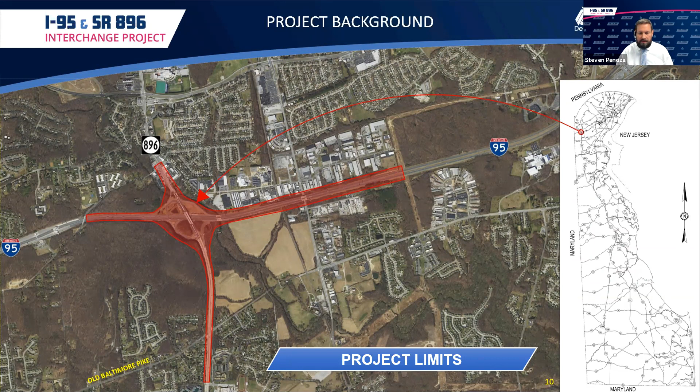So let's talk about the project background. These are our project limits on 896, from the Glasgow High School entrance going north on 896 up to the intersection with Welsh Tract Road. Along I-95, our limits are just east of the toll plaza, running east over Route 72 to about 2,000 feet. You can see the clearing there, that is for big overhead power lines.

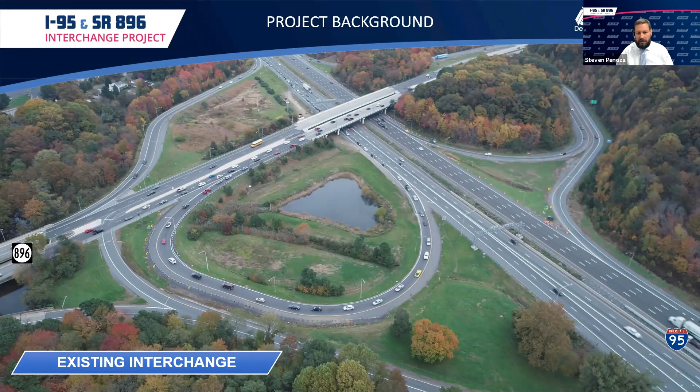So those are our project limits. Here's a drone shot of the existing interchange. You can tell that this was definitely done during the PM commute home. You can see in the outside travel lane of I-95 southbound, cars are starting to back up, which is one of the major issues with the current interchange configuration.

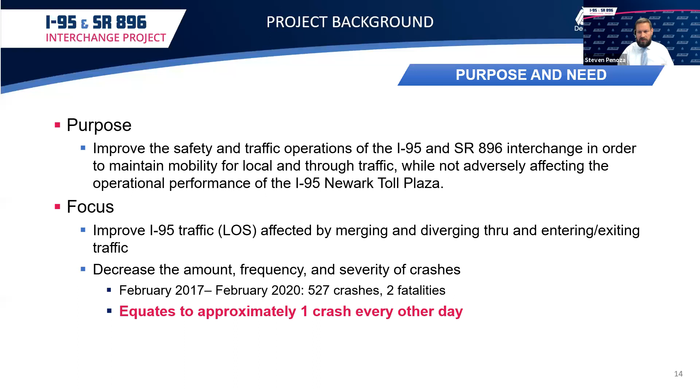So public outreach that we've done to date for some of you that have participated in those efforts. Back in December of 2017, we did our first public workshop, in person pre-COVID, much different format than today. At that workshop, we presented our purpose and need, as well as our 3 build alternatives. We had 137 people that attended.

The public was very much in favor of the project. Looking through the comment forms we got, 43% of people preferred alternative 1, which was our double flyover alternative. Then following that up in November of 2018, we sent out a project newsletter announcing that alternative 1, the double flyover, was chosen to take into preliminary design.

So now let's talk about our proposed improvements.

While the main interchange project is going through design, we did some breakout projects that we're calling our interim improvement projects. 2 of those were completed in 2020. Both were signing and restriping projects that we could get out quickly, that would help alleviate some of the issues we have out there today, but not solve the main issue of that weave we discussed on the bridge. That requires reconfiguration of the interchange.

Northbound I-95 signing and restriping, which we did in the summer of 2020. We created a dedicated lane for northbound 896 to northbound I-95. So the ramp traffic on that ramp traveling northbound 896 to northbound 95 now merges into its own lane. Prior to that, I-95 is down to 3 lanes, and then this ramp traffic comes on as its own dedicated lane, so that helps with the merging of traffic.

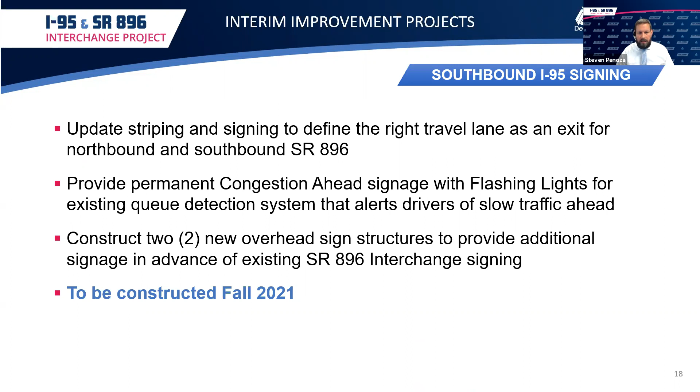As part of this project, we're going to construct 2 new overhead sign structures to provide additional signage in advance of the existing interchange signing. These 2 sign structures will be built to the east of what's out there today, and these signs were already going to be incorporated into the final interchange. We're just putting up these 2 structures ahead of time to help with some of the signing leading up to 896 to better define that exit. This project should be started and finished in the fall of this year.

So this is just a diagram of the sign that we're doing. Again, it's putting up 2 new sign structures and then also doing some overlay signage on the existing sign structures that are out there today.

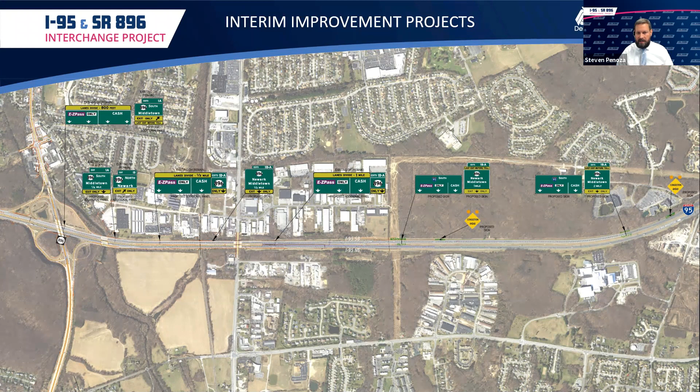This slide is just a summary of the proposed design elements. It's a complete reconfiguration of the existing interchange. All the ramps are getting reconfigured. We have to do some pretty extensive widening on I-95 southbound and northbound for the new ramp acceleration and deceleration lanes. The ramps are going to tie in with much longer acceleration lanes. The southbound ramp will have a 2-lane deceleration lane. So we're adding a lot more capacity for the merging and diverging of traffic.

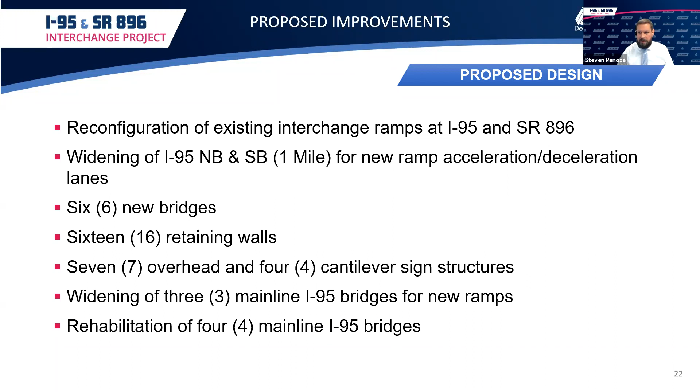As I said earlier, this is a major diverge interchange. It includes 6 brand new bridges, 16 retaining walls to retain our fill, 7 overhead and 4 cantilever sign structures. We're going to be widening 3 mainline I-95 bridges for the new ramps, and we're also going to rehabilitate the 4 mainline I-95 bridges that fall within the project limits. So a lot of work is being done for this interchange.

Now I'm going to walk you through each of the different ramp movements in the future configuration. First is ramp A, which would be if you're coming southbound on 95 and want to exit to northbound 896 into Newark. This ramp is very similar to today as far as getting off and merging on.

Ramp C is the flyover we talked about, southbound on 95 to get to southbound 896. Then we have our other flyover, ramp D, which is southbound 896 coming out of Newark to head onto northbound I-95 towards Wilmington.

Going the other way, 896 northbound or southbound to head south on 95, you'll take those exit ramps. Again, configurations are very similar to today, they're just moved closer to the interchange.

Finally, we have ramp J, which is our other heavy ramp movement. This is your northbound 896 to 95 northbound. As I said, today that ramp is only one lane, so in the future this will be a 2-lane ramp.

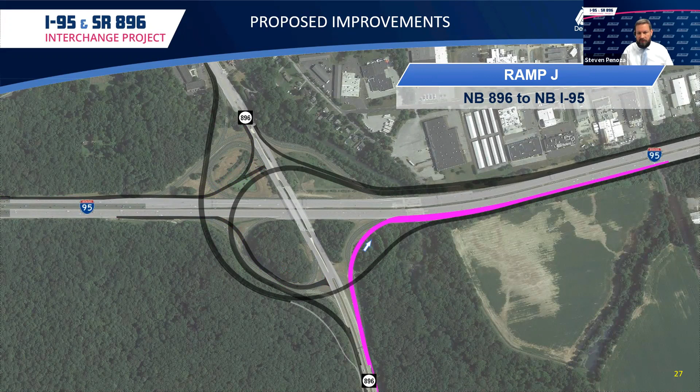We did add some additional work to the project since our last workshop. This work through the old Baltimore Pike intersection was originally going to be a project done in advance of the interchange. Construction for the interchange was moved up 2 years, which we'll talk about a little later, so it was decided we needed to incorporate this work into the interchange project itself.

This slide's for all the bridge fans out there, showing all the different structures on the project. The pink are our new big curved girder structures. Top left you see the blue, that's a new bridge over the Christina River. The green are the bridges we talked about being widened and rehabilitated. The yellow is a culvert that's going to be extended, and the orange lines on the 2 flyover ramps are all of our new retaining walls. Just wanted to point out that there's a large number of structures on this project.

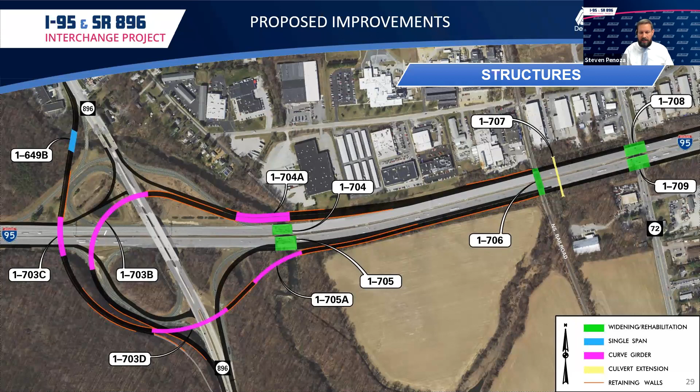One of the unique elements about the project is that, directly generated from public feedback at the first workshop, there was a big need for a shared use path crossing I-95. We were able to accommodate that with our alternative, a 10-foot wide shared use path connecting from Old Baltimore Pike up to Welsh Tract Road. This provides the missing link across I-95 for multimodal use. As the trail comes off of 896 and runs along ramp D, shown there in yellow, it'll be protected by a concrete barrier from the traffic going through the interchange.

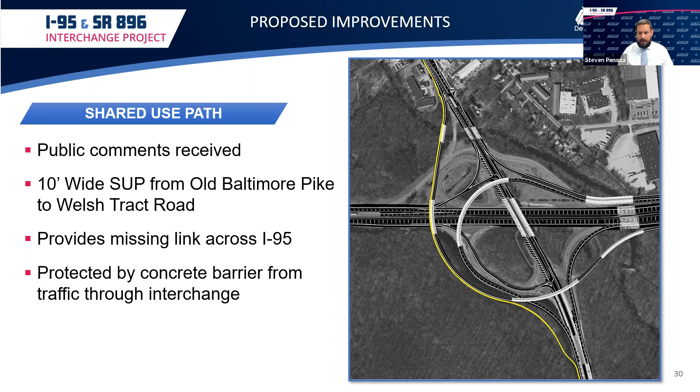We do have some impacts to resources, but we have no direct impacts to Iron Hill Park, which was another big reason we selected the alternative that we did. We also have no direct impacts to Cooch's Bridge Historic District. We do have wetland impacts that will require mitigation, so we are now evaluating off-site locations for a wetland mitigation site, as there's nothing on site suitable for the requirements we need.

We also have impacts to trees, so that's also going to require mitigation, and we're evaluating some off-site locations for tree mitigation. Some of those are also going to be sites that we're looking at for wetland mitigation as well.

Last, I just want to point out that there is a temporary impact to a bus stop in front of Rodeway Inn, and that'll be further coordinated with the department, whether there's a temporary bus stop added or if we direct people to the bus station that's about 1,600 feet up the road from there.

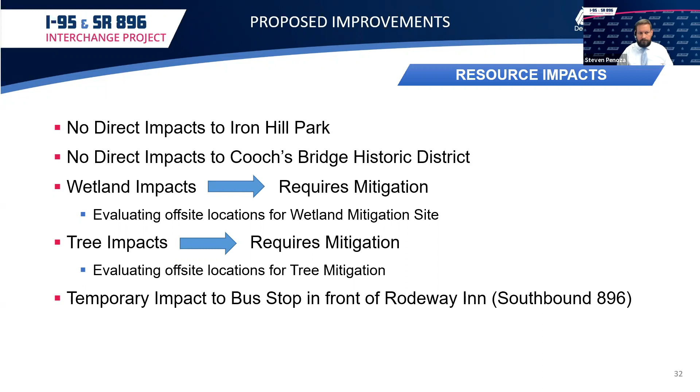This project does not have a lot of right-of-way needs. We have very limited property impacts. The majority of the interchange itself along I-95 is being built within the existing property that the state owns now.

This slide shows what we do need. So what you see in green are PEs, which are permanent easements that we need for both utilities and the shared use path, as well as some drainage on the left side of the screen. The blue is a TCE, which is a temporary construction easement. This is just a temporary easement that we need during construction to do some of our tie-in work, some repaving at the entrances, that type of work.

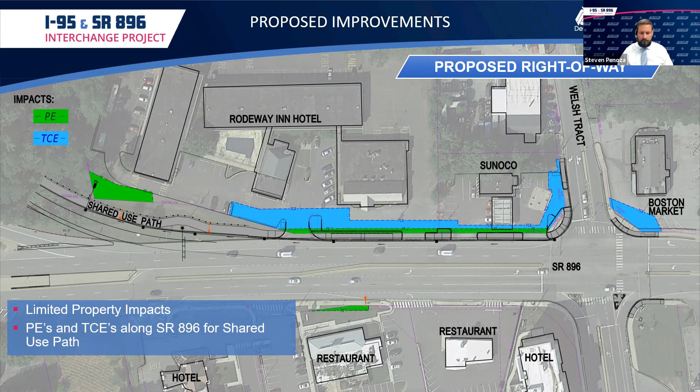I'm not going to go into the construction phasing for this project as it's still being refined, and we'll discuss why a little later, that's still in the refinement stage.

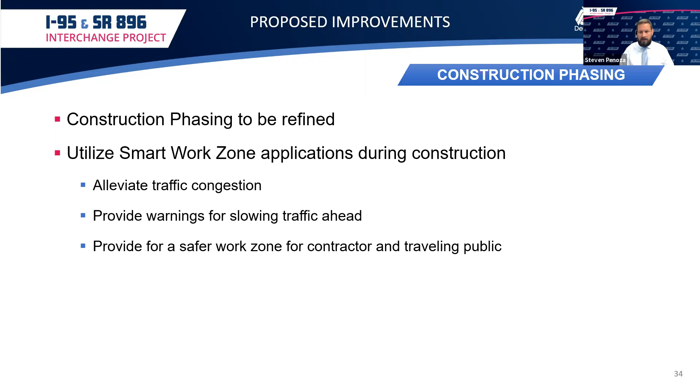But one of the things we are looking at doing is utilizing smart work zone applications during the construction. There's a lot of different things that go into that we're analyzing now, but the idea with smart work zone is to help to alleviate traffic congestion during construction, provide warnings for slowing traffic ahead, and the biggest thing is to provide a safer work zone for our contractor as well as for the traveling public.

Our estimated total project cost is $165 million. The good news is that DelDOT received an INFRA grant for $56.8 million. INFRA stands for Infrastructure for Rebuilding America, and basically the grant is to build and repair critical pieces of the freight and highway transportation network. We were selected based on reducing the congestion and bottlenecks to the freight network, as well as increasing safety of the interchange.

So what this has allowed is the project to get locked into FY23, which is the fall of 22 construction. That's when I talked about the project getting moved 2 years up in construction. It had previously been pushed out, and now we were able to move the project back up on schedule when we originally were planning on constructing it. This also has allowed us to pursue accelerated project delivery, which I'll go into in a little bit.

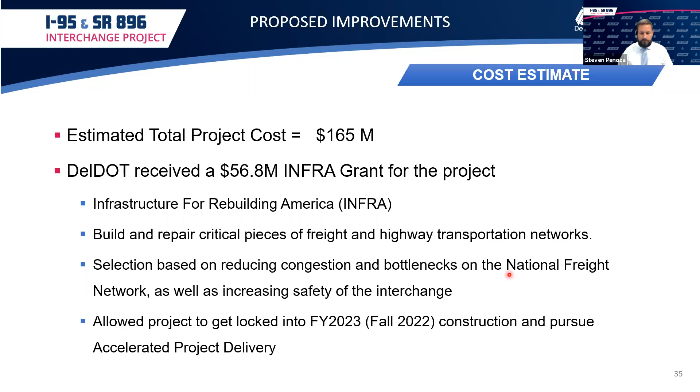Moving forward, we will be doing a robust public awareness campaign leading up to and during construction. There will be coordination with the local businesses along the 896 corridor to the north of the interchange in particular, and then additional outreach once the construction phasing is finalized.

Now I just want to talk a little bit about accelerated project delivery. Locking in our construction funds allowed us to pursue this. So this project is moving into a contracting method called CMGC, Construction Manager, General Contractor. This is a unique method used to accelerate project delivery.

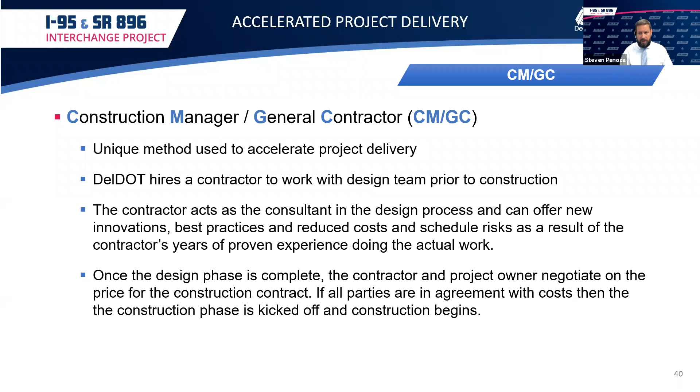CMGC is currently being used on the Restore the Corridor project on I-95 in Wilmington, for those familiar with it. So what are the advantages of CMGC?

Fewer change orders and less overruns. Working with the contractor, we can identify things in the design to look at so we're not going to get hit with changes during construction, because the contractor is working with us.

Efficiency during design from collaboration with the contractor—we're going to work together on the design. There are opportunities for innovation during design. As a design team, we may have innovations we bring to the contractor to see if they're feasible with how they want to do things, and vice versa—they'll bring ideas from other projects that can help save time and money on this project.

We can begin construction before design is even completed. Similar to the Restore the Corridor project, they did early work packages. The same can be done here, where we can start construction even earlier than design completion, before we're ready to do the final interchange construction.

It's basically a better relationship with the contractor—we're going to work in a team atmosphere. Normally we design the project, the contract is bid out, and the contractor and us go back and forth. This is going to be a complete collaboration on the project with the contractor.

It also mitigates owner risk for DelDOT and optimizes the construction schedule. The reason we're still waiting to refine our construction phasing has a lot to do with the way the contractor wants to build the job.

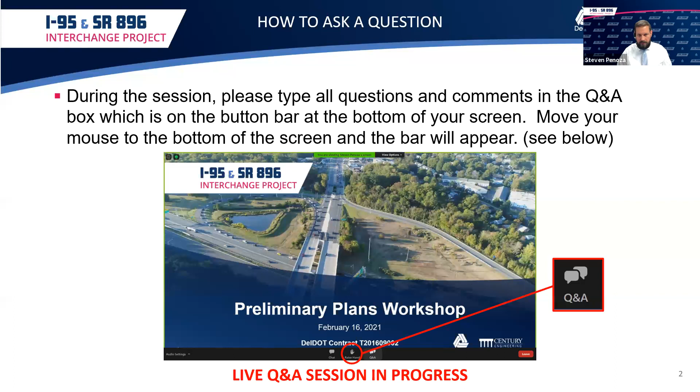Yeah, let me pull up the slideshow. There we go.

So as I said, this project is a major diverge. There is a lot of traffic today that gets off to go north and south of the interchange. The interchange itself, that's the biggest issue—it just doesn't have the capacity to meet the traffic on and off. The volumes here are almost to the point where it would be a major diverge for two interstates. That's the volume of traffic you get, especially in your peak hours.

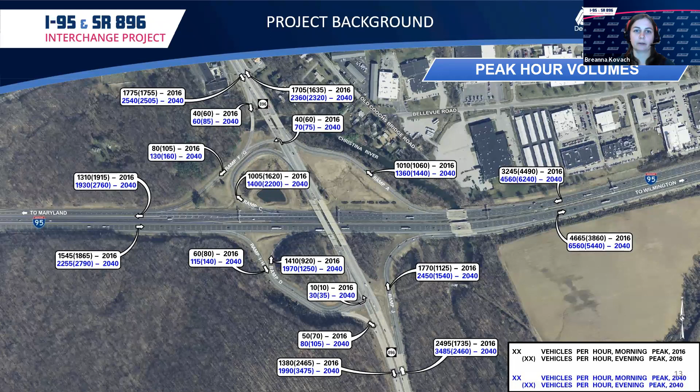Just to piggyback off of what Steve was saying, and what he mentioned earlier, I want to reiterate that not only do we have operational issues here at the interchange, we have major safety issues too, and there seems to be a pretty direct correlation with the operational issues we see here.

Yep, this is the slide. So just trying to reiterate that we're really trying to solve the issues we see. Again, the purpose and need of this project - understanding, yes, it is a bigger ticket project, but throughout the years, actually probably over a decade, there have been different changes we've tried to implement at this interchange, and some small fixes on the ramps. As Steve mentioned earlier, we've done interim projects between when we started this one back up in 2016 to now. We've done these little Band-Aid projects, and ultimately we still have these issues out here. So that's why we need this big makeover of the interchange.

All right, thank you very much.

Next question in general is regarding the noise levels along this corridor. There were several questions asked - is there any concern with additional noise this project may bring? Steve, I'll turn that back over to you.

As part of the NEPA process we go through for our environmental document, we have to do noise monitoring. So we did do our noise monitoring for this project, and based off of that noise study, it did not warrant having to do noise mitigation.

All right, thank you very much. Question regarding signals - are any of the ramps going to be signalized? No, that's a good question though.

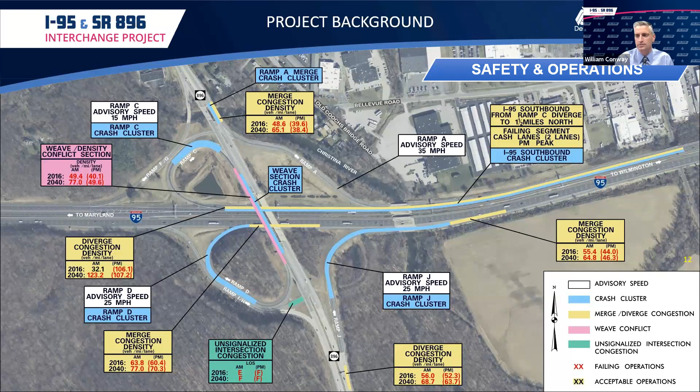Thank you, Pam. Okay, the next question is about barrier walls. Is there any other devices used to limit the cut-through drivers with the new plan? There are several safety devices out there, but I think the concern here is potentially cutting over 896. Steve, do we want to touch on that a little bit?

896 will remain very similar to as it is today. The medians are getting reconfigured in some places, but it will still have the median that runs down there as it is today. The only difference is one bridge will have a bridge pier in the middle of 896. But other than that, we're not really changing anything on 896 itself. Okay, thank you.

There's a question, and I believe this regards the larger I-95 project. How does this project interface with the I-95 project? Will it create more congestion initially?

Steve, you want to touch on the timing? This project will not be until after that project is complete. Yep, that is correct, and we don't anticipate any overlap on that.

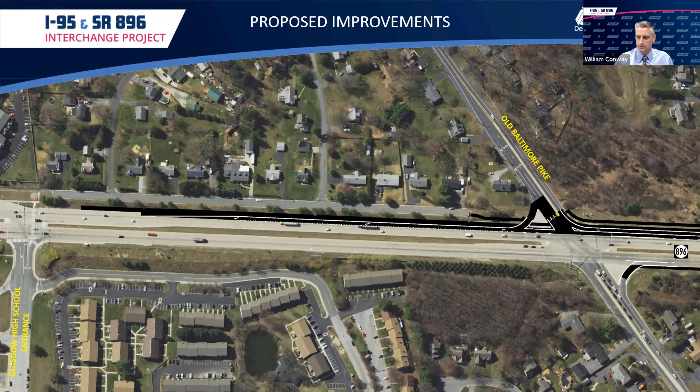Right, because we merge into a 3-lane section.

Good, and Bill, sorry to interrupt, but I wanted to chime in - I know there's been a bunch of questions about construction timing and lane restrictions, and we're not trying to withhold anything. What Steve pointed to is that since we're bringing on the potential contractor very shortly, we're going to work hand in hand with him to come up with the best maintenance of traffic scheme.

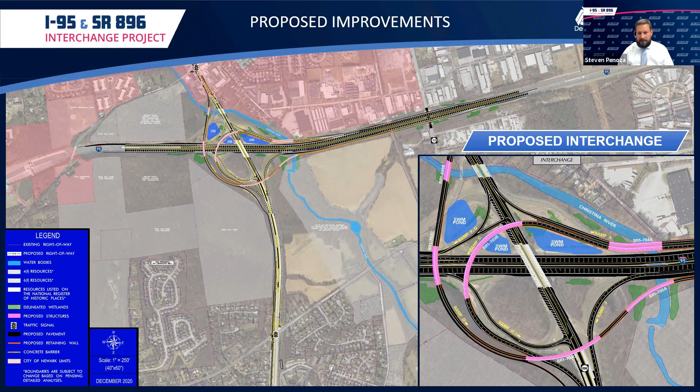Let me go to the next slide, it's a little easier to see. So today you have 4 lanes on I-95. Right now it's 3 lanes because we have a drop lane for this ramp, and we created a merge lane for this lane here. In the future condition, I-95 will go back to 4 lanes.

So today, prior to our interim project, you had the loop ramp that merged here, and then you have a very short distance between when all this heavy traffic is merging on northbound 95, and then the traffic from northbound 896 also merging. You can see how close that merge distance is.

In our revised configuration of the interchange, we're taking this 2-lane northbound 896 ramp and merging it onto I-95, giving a much bigger distance. I think the minimum requirement is 1,000 feet, and we extended it to 2,000 feet, since we expect the traffic to continue to grow. So we've separated that out.

What that does is allow this traffic to merge in with these 4 lanes of I-95 traffic before the ramp D flyover. Ramp D, as it runs along 95, is separated from I-95 with a concrete barrier, so those people can't merge onto I-95 until we get all the way down the end of the ramp. So all the traffic is allowed to merge over, and then we introduce the next merge to the north.

All right, thank you very much. Yeah, sorry, go ahead. No, go ahead, you're good.